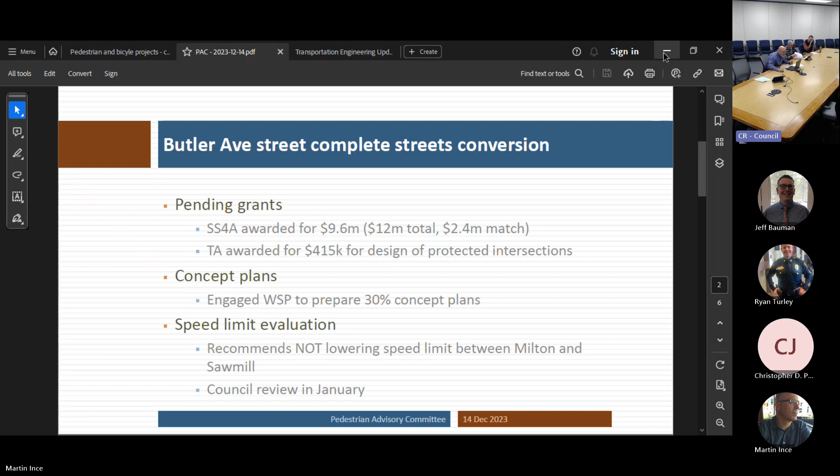Moving on to new business: pedestrian and bicycle project capital and grants planning.

We recently kicked off the city's annual budget season, in which the entire budget for the city is prepared, reviewed, discussed, revised, and discussed again. At some point before June 30th, it goes to council for final approval. One component of that is the capital plan, which we do every year at the same time. For the capital plan, we identify capital projects we want to build over the next 5 years. Anything that goes in next fiscal year's budget, we have money for - it's physically part of the budget. Anything in the 4 years after that is a plan. So in theory, if we build what we intend to next year, the first year of the capital program moves up and becomes our budget, and we cycle through it. Rarely, however, does it actually work that smoothly.

Over the past couple of years, the ped and bike part of it is fairly well organized, if I do say so myself. We've identified all the projects we want to build and prioritized them, talking about which ones should go first. So much of what was in the plan last year will show up in the plan again this year. Our primary funding source is the transportation tax, which allotted $29 million over the 20-year life of the tax. That started in 2020, so it's been collecting money for a couple of years already. We can also supplement that with any grants that come our way, and we've been successful twice - we got $5.5 million for first mile, last mile, and now almost 10 million for the Butler project. So that certainly helps.

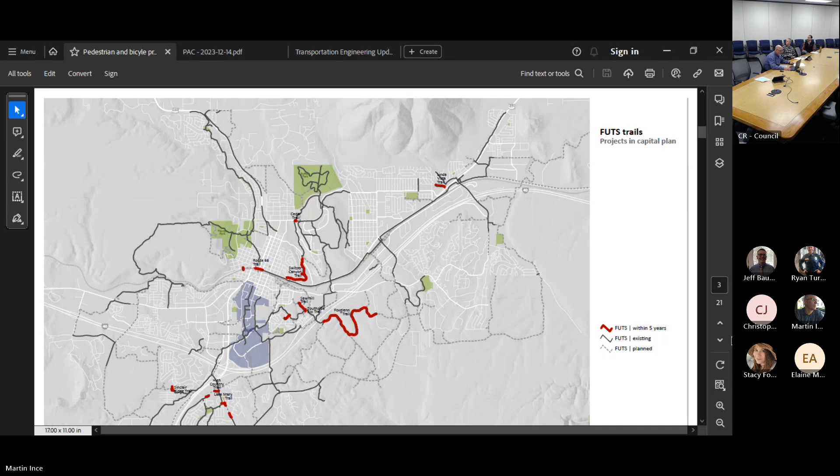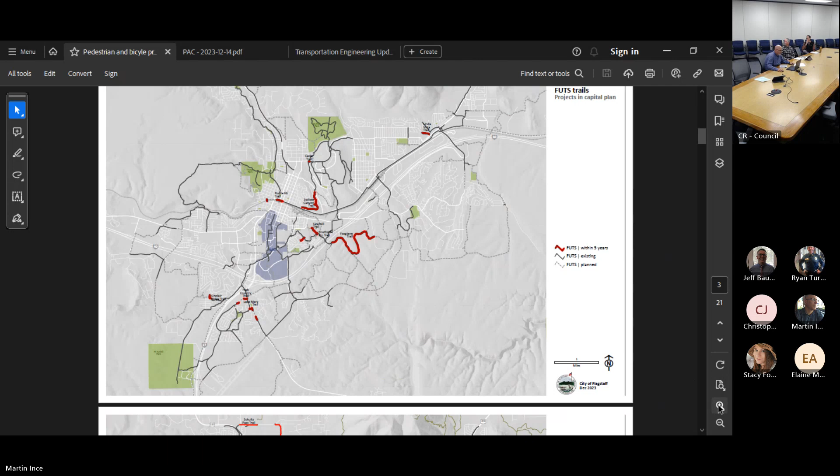Let's see if we can... Is it tough to see, or is that okay? It's tough, but... oh, that's better. Thank you.

Okay, so this shows the projects that we'll have funded over the next 5 years. Switzer Canyon, we've been working on for a while. Fox Glen has always been kind of out there. Those are the two big projects.

A few of these other ones you can see are kind of fill-in, like the ones down here at High Country and Lake Mary. We're anticipating that development is going to build the pieces in between - you can see these are two ends. Once development does that, there becomes a greater need to complete those end pieces to make the thing functional. And then a couple other short ones.

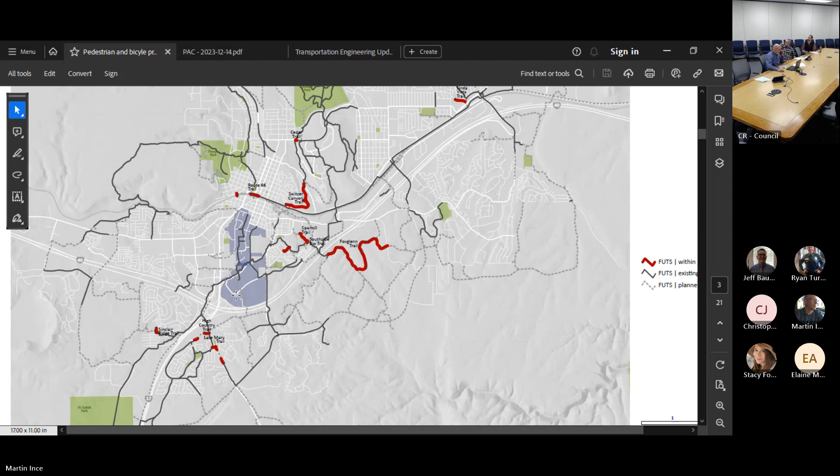So here are the single track connectors. One of the advantages of these is that they tend to be less expensive than full FUTS trails—well, a lot less expensive. So if we put a little money aside, we can afford more of them.

This may be a little bit ideal, but this is what we would have money for over the next 5 years to build these out. So if the budget is approved, there would be funding for these over the next 5 years.

That'd be great. Nothing wrong with that. It's wonderful—that's a lot of trails. Maybe a little bit optimistic, but I like that, Picture Canyon would be nice. Get off the road, yeah, that would be nice, wouldn't it?

And then some of these provide access to—so that one at the end of Paradise is also relevant to my professional interests.

What exactly is that one? I think that's actually going to get done as part of the basins that are going in. So we have a couple places within the city that have trail access out to that. It used to be a city park, designated as a city park, and now it's where the basins are going—one's from the end of Appalachian, one's from the end of Adrian. So it's from the end of Park.

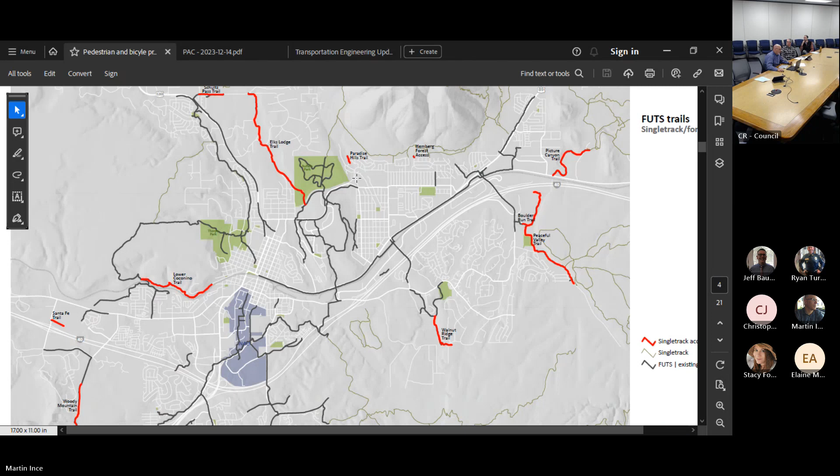So those are single track, and then a couple over here in the southwest are really connections for the loop trail. This one along Woody Mountain continues the loop trail—the Santa Fe Trail. What you don't see here is the piece in between would be built as part of future phases of Timber Sky. So they'll build a FUTS trail up to their property line, and then we have a short distance to go to connect here in red to Flag Ranch Road, which would make that a really useful connection—even for people who work at Gore, for example, would find that useful.

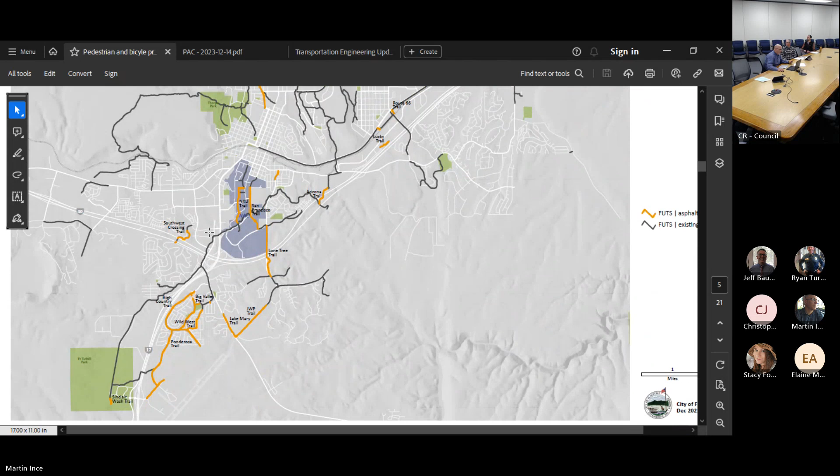These are the asphalt trails.

So the ones on the NAU campus are not the city's to maintain. Some of the shorter ones, we probably won't include. The Southwest Crossing one, that's in fairly bad shape.

Which one is that? It's the one that goes under the interstate from like Boulder Point to University Heights. Oh yeah, thanks, that name.

The other ones are more familiar—the one along Fort Valley Road, along Lone Tree, JWP and Lake Mary—those are actually in pretty good shape. Is it? Yeah, it's not bad. Yeah, the Lone Tree one's got gaps.

Is JWP—I almost killed myself on that, there's these huge potholes. Yeah, maybe it's on the south side. Not the gaps, okay. Yeah, Lone Tree's bad enough to where—really? JWP, asphalt FUTS path—yeah, is it really? Yeah, it's really bad, at least if you're on a bike. I mean if you're just walking, obviously it's not a big deal.

Yeah, when I saw you and I came out that way, I thought it was all right, but I guess I was going a little bit slower than you were going, John. Yeah, if you just walk it it's fine. I guess relative to Lone Tree, it's—yeah, Lone Tree's a mess.

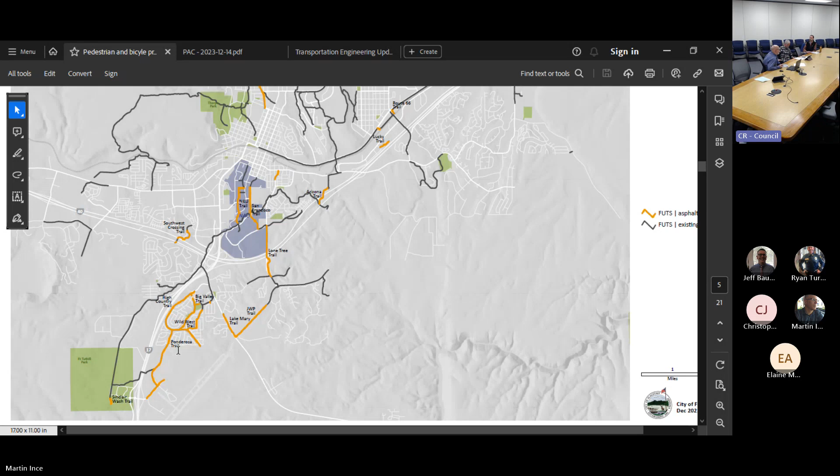I think, when I look at the map, there's only a couple that aren't along roads. The one through the middle of Ponderosa Trails neighborhood is one, and that southwest one is another. So in theory, we could think about converting those to aggregate. But I think by the time you factor in the cost and the reduction in usability, it probably isn't a good investment for the city, but we'll keep it on the table.

And then the last map here is potential grant projects. You can see our Picture Canyon Trail really works best if we can extend that FUTS path all the way past Home Depot.

Marshall Trail, the context for that is changing a little bit because the school district is planning on demolishing the existing building and building a new one across the street, where charter schools were most recently, and some time ago that used to be junior high, Flag Junior High. The need for the trail is still there to make that connection over from Fort Valley, but it may be a little easier since there may be fewer encumbrances on that property.

This group is really the trail that goes up to Lowell. That would be separate from the road that goes up, but it includes the realignment of the Mars Hill Trail, the really, really steep section.

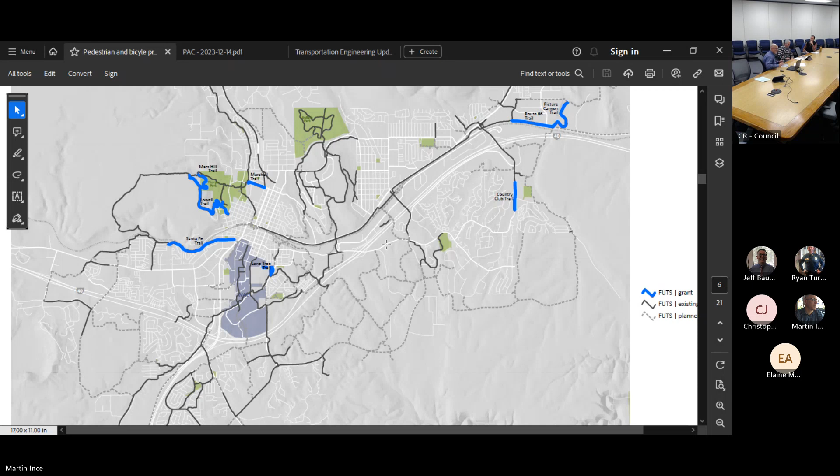Okay, moving on to sidewalks. Our categories in the capital plan here are sidewalk infill, sidewalk projects, and then first mile, last mile, and potential grants. I'll go right to the maps.

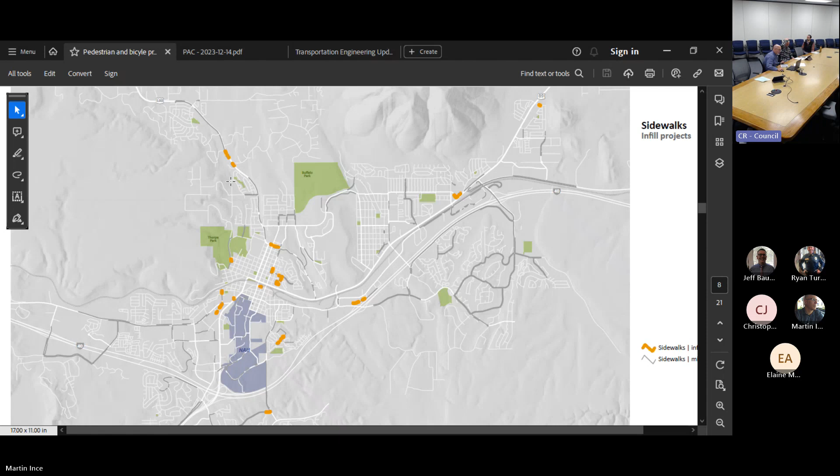These are the infill projects. We've had a good relationship with the city's streets department, so we use the same contractor that does the road repair and street safety projects, the mill and fill overlays on streets. If we can identify sidewalks and give them the money for it, their contractor is happy to do the sidewalks as well. At this point, we've done all the easy ones that don't require plans, where a sidewalk ends here and ends here, and you just pour the sidewalk in between to connect. The next round will probably require some version of an engineered plan to see how they're going to work, and it may require curb and gutter, small retaining walls, grading, drainage considerations, whatever it is, but we'll include that as part of it and hope to keep doing that.

Here are the projects. We only had two identified: the missing sidewalks on Fourth Street, and then we've been talking about adding a sidewalk bike lane along the Linda Vista ramp, which goes from Linda Vista to Cedar.

Can you picture how that works? Would that be impacted by the wedge detention basin at all? The road's still going to be there, I guess. We would build on the other side of it, so it wouldn't be physically impacted. It would be part of the same project, taking advantage of the work being done there. If we give them some money, they'll already be mobilized. So I think it's a good opportunity. I just want to double check, we had not identified this before as one of our potential projects. It probably falls into that second wave of priorities, but it feels like a good opportunity since somebody's already kind of there.

No matter what we do, that detention basin is not gonna look great. So any other improvements we can make in the area to make it that corridor? That whole Rocket Cedar is gonna get hit with some flood mitigation stuff soon, and it's going to look different. That's a good way of putting it. So we'll distract the pedestrians with a nice sidewalk.

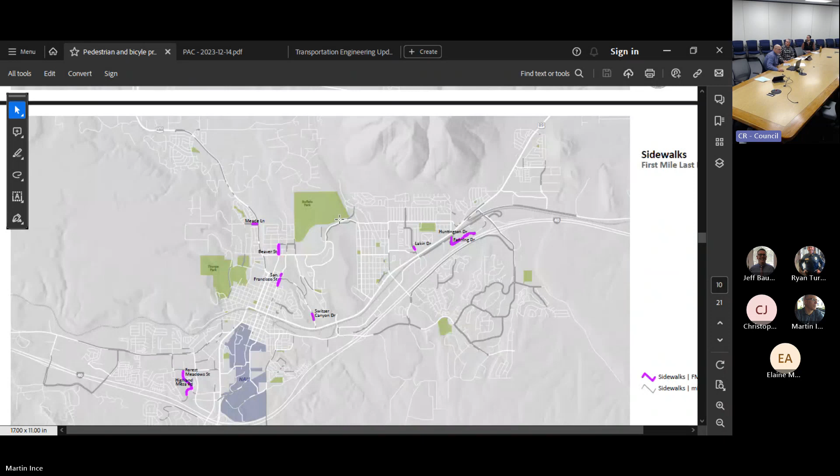Moving to first mile, last mile. That's really the reason we don't have many sidewalk projects identified, because we have more of them here in the first mile, last mile grant. We're working on this and will give an update later on the status of that project, but we're continuing to work through the engineering part of it.

And these are the sidewalks that we're considering. And the last one is potential grant projects. Some of these overlap - like you say, aren't those the fourth ones? Yeah, yeah.

How do they overlap? Wasn't it capital project they were listed under? Yes, so if we identified them for grant funding and got a grant, it would just supplant the capital money - we'd use that somewhere else. Some of these, like the ones by San Francisco and the one on Fort Valley, and even some over here by University, were originally part of first mile, last mile, but for different reasons have dropped out. So a different grant might be a way to pick them back up.

I just have a little bit about bikeways. Our categories are signing, bicycle parking, projects that involve only striping and marking, bike boulevards in the out years of the capital plan. Are you familiar with bike boulevards? They're quiet residential streets that make good bike alignments.

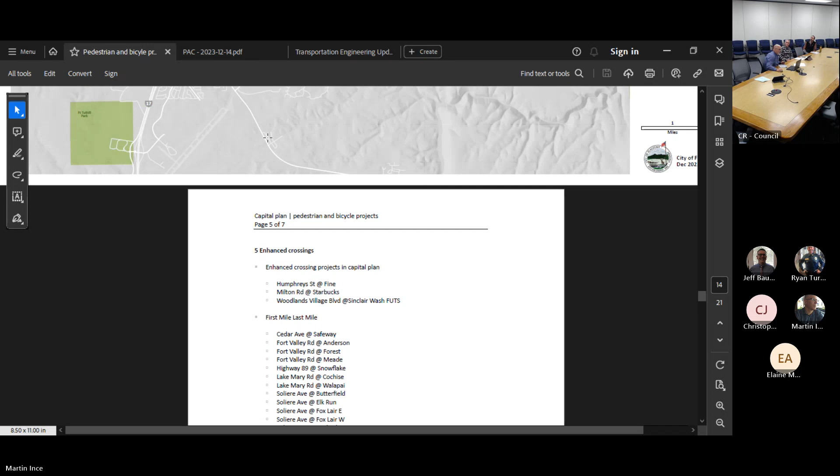So is this widening of the road and construction of, sounds like separate bike paths, or it says bikeway - what does that mean exactly on there? It would depend - some of these, like the Milton one, this one on the west side, and the one out here, would be a combination of improvements on existing streets, and then maybe trails that connect in between, where necessary.

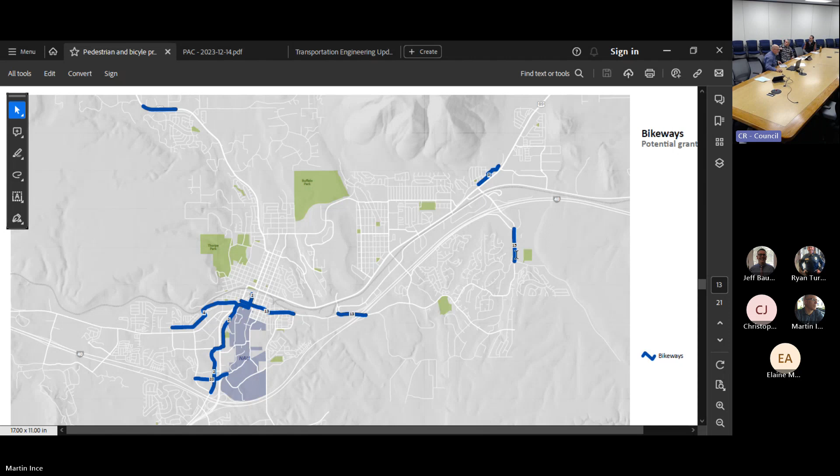This one could be on-street facilities, or if it's a bigger project, it could construct separated facilities through that area. This would probably be a construction project just to replace what's there now. So the details haven't been totally figured out - this is just conceptual, broad brush.

That would be one of the purposes of doing the concept plans for it, is to get more detail, so when we ask for a grant, we know exactly what we're asking for, and what it might cost. Enhanced crossings - we have a couple of projects in the capital plan, a handful of them in first mile, last mile, and then a few of them are good potential grants. I'll show you the maps.

Here are the potential projects: Humphreys at Fine, that's on an ADOT right of way; Milton, somewhere in the vicinity of Starbucks, also on ADOT.

And then we've included this one, but I know there are some issues we need to work through to make it work. It's the crossing on Woodlands Village, between the Walmart and Big 5. That one's a little tricky. I live in University Heights, and that crossing prevents me from having my kids take the public bus home from school, because it's so hard to get across that thing.

Yeah, people just, when they come out, they're like, whoa. I know it's there, right. I could use some help. I'm driving slow because your kids might pop out. So I point out, especially there, yeah.

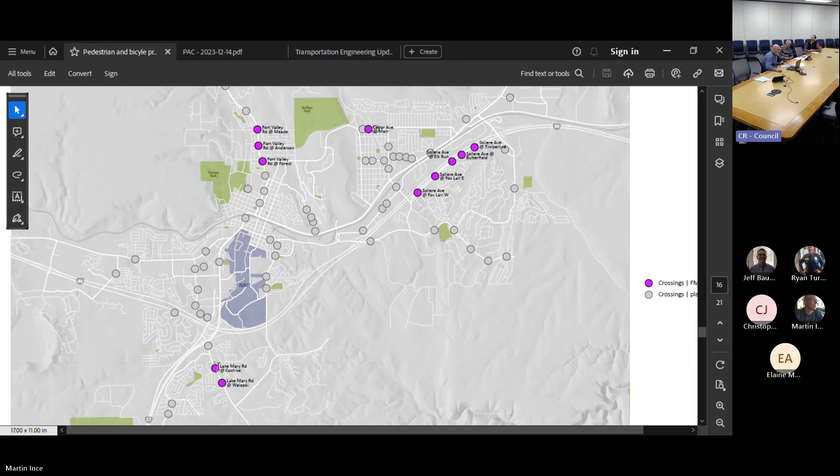And then here are the grant ones. Humphreys at Fine and the Milton ones show up again, if they would make good grant projects. We had identified the one at Butler Avenue on O'Leary in the past and actually had it in the capital plan, but it's been absorbed into the Safe Streets for All project. And then this one I show, Huntington Drive. Flag Shelter Services has bought the hotel there. Mountain Line has a transit stop, so we're working on different ways of getting people across Huntington. If that were a grant, it would be something Mountain Line applied for, not necessarily the city.

And then I should mention all these other, kind of grayed out ones, are where we have identified potential crossings, but not all of them are high priority.

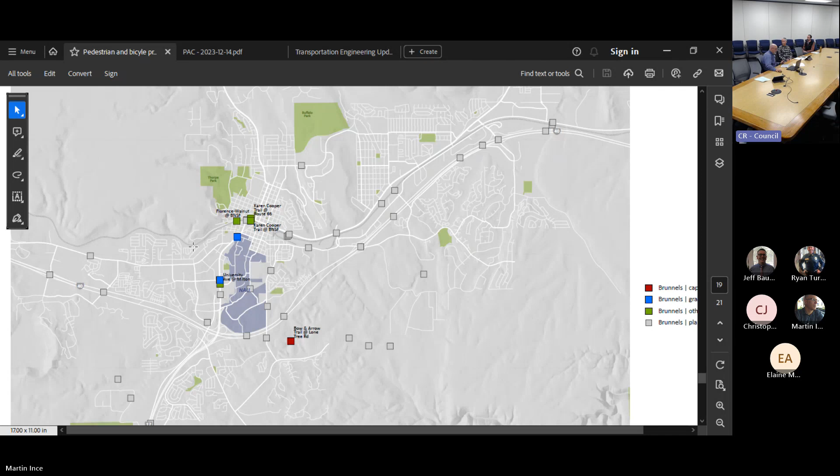And then again, the gray ones are other planned projects, but these are the ones that have floated to the top as priorities. And then the last category, we haven't had in the capital plan before. We just included them to see if they would make good grant projects.

We call them complete streets or street conversions, but they fall into different categories even below that. So I'll show you the map. This is Fremont, that's what we're working on already to narrow the road. And this is Country Club here, from Oakmont or Bear Paw on the south up to Soliere on the north.

As a complete street, we'd be looking at all the things. It needs a sidewalk on one side. We talked about a bikeway or a path on the other side. So can all those things be wrapped into kind of one project? Similar with Cedar Avenue—can that street be redone in a way to make it easier to cross, more comfortable for pedestrians and bikes? 4th Street, kind of the same category.

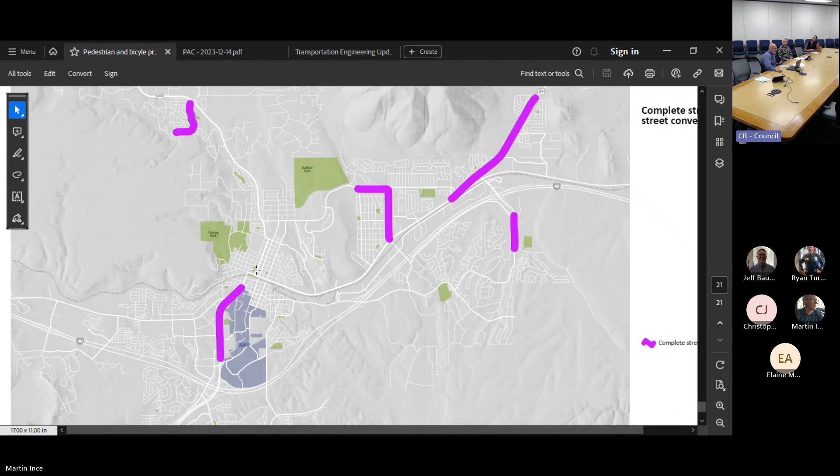The other two we have on here are Milton and Highway 89. These are shown here because either a safety study is being conducted, or we've asked for a safety study to be conducted. The results of that may suggest projects to improve safety that could be eligible for grant funding. So we don't know what it would look like, but those might be future projects, so we'll include a placeholder in the capital plan.

And that's kind of it. That's it? That's it. That's all?

Yeah, makes me feel better about paying my property taxes. No, there's some great stuff in there, and good progress. Actually, it's less your property taxes, more like sales tax. Okay, well, I have no trouble buying stuff too, so continue. So if you're putting off buying that new Mercedes, for example. Well, I'm more of a 10-year-old Toyota guy. So we will continue, I'll include this on future agendas, but we may not have to have a lot of discussion, just to show you where we are in the process and what our thinking is. Yeah, that was great, part of it.

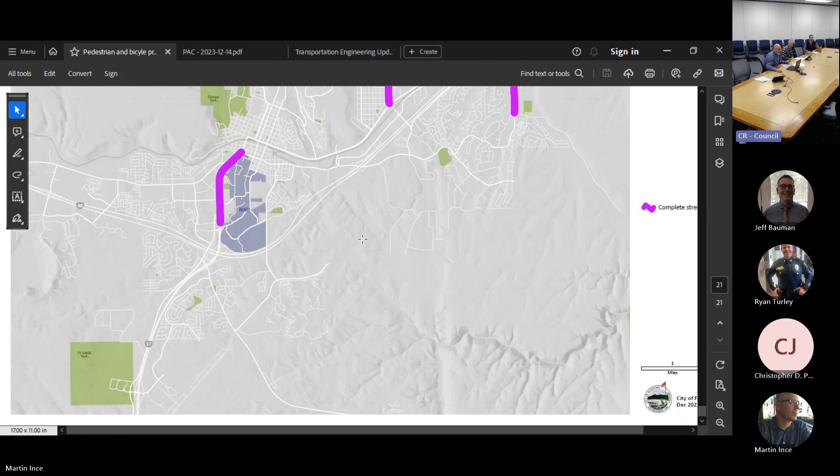Second item on new business: revisions to engineering standards.

There was no—every time it meets, yeah. Oh, and she can come in. Back. Good.

Okay, so just a little bit of context on this. The city has a document of engineering standards, and it essentially tells people how to build things. For example, there's a detail in there for FUTS trails, about how they're supposed to be built, how thick the concrete is, how wide they are, all that kind of thing. And then you can imagine all the other things that people build, from manholes to water lines to fire hydrants, are all included in the engineering standards, so they're built appropriately and in a way that reduces maintenance. So periodically, these are updated.

Following adoption of the Active Transportation Master Plan, we did a comprehensive review of the engineering standards to see what we might change to bring it more in line with the recommendations or the wording in the ATMP.

We've taken all those potential changes and divided them into three categories. The first are the ones that are relatively easy to do—those are the ones we're working on now that we'll talk about tonight. The second category are relatively easy, but require either more information or more discussion on the part of staff before they're ready to move forward. And the third category are the ones that are more difficult, that require a lot of information or a lot of conversation with the public, even a consultant study in some cases, to figure out how we want to change the engineering standards to incorporate those.

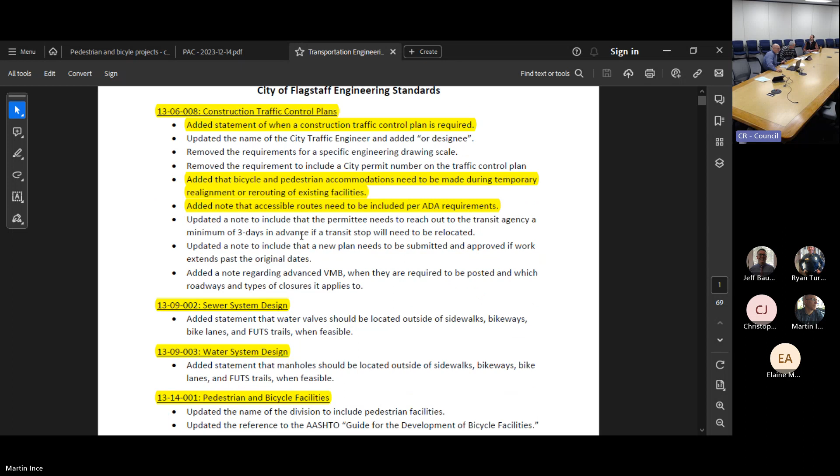So again, this is just the first round. I've highlighted the ones in yellow for us to talk about—those are really related to our mission here, pedestrian accommodation, as well as the ones that relate to the Active Transportation Master Plan. So I'm going to go through this. This is a short synopsis of the changes. I'll describe what they are, and then the actual changes are further down in this document. We'll look at a couple of them, but not all of them. And again, if you have any questions or comments about them, just jump in.

The first section is about traffic control plans. This is when construction or maintenance activities can affect streets, close lanes, or close the entire street.

We've added a statement here that whenever you affect sidewalks, bike lanes, or FUTS trails, a traffic control plan is required. This gives us an opportunity to review the plan and make sure there's a detour in place, or that the facility isn't being closed unnecessarily, and gives us a bit more control. We generally try to do this anyway, but having it explicit in the engineering standards gives us more leverage.

We've also added that bike and ped accommodation needs to be made when we have temporary realignments or rerouting, so either they are accommodated through the work zone or a detour is provided for them.

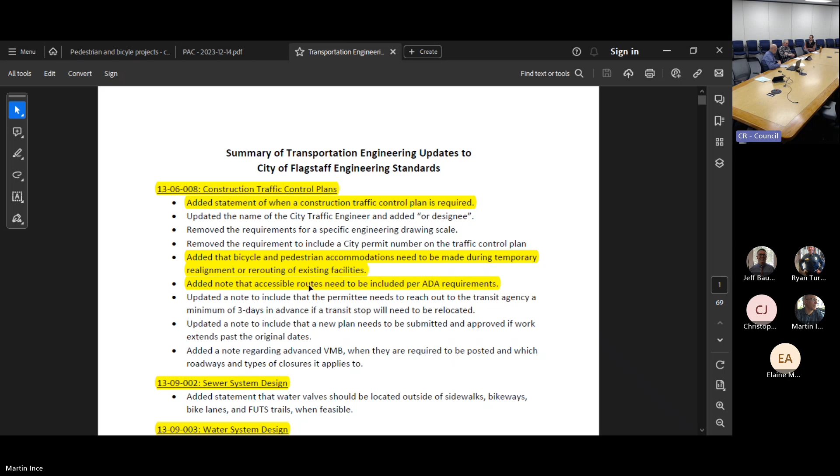The same goes for accessible routes. This is actually part of the new ADA guidelines. If you have an accessible route along a street, you have to maintain that route during construction. And that includes, if you have a new temporary sidewalk alignment, it has to have ADA grades, sidewalk ramps, all of that.

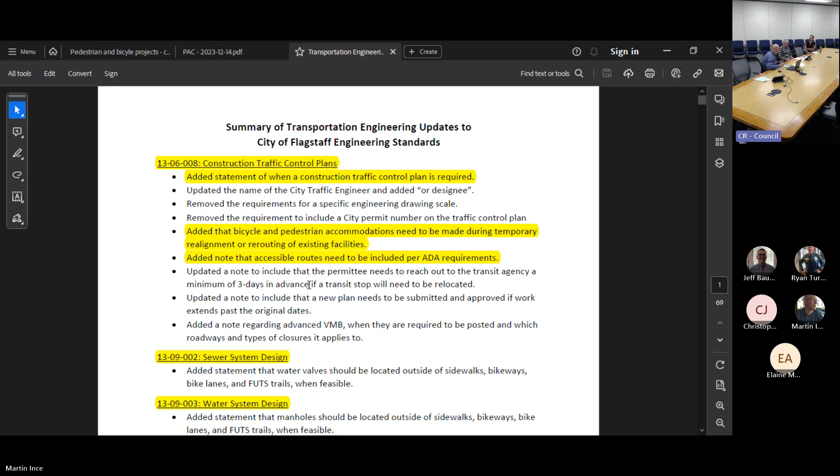Next, these two go together. It's simply that where we build water valves and manholes, they should be outside of sidewalks, bike lanes, and FUTS trails wherever possible.

Next down, sections 13-14 in the engineering standards currently have almost nothing in them, just a brief reference to a bicycle guide. So we're adding more text for bikeways, pedestrian facilities, and FUTS trails.

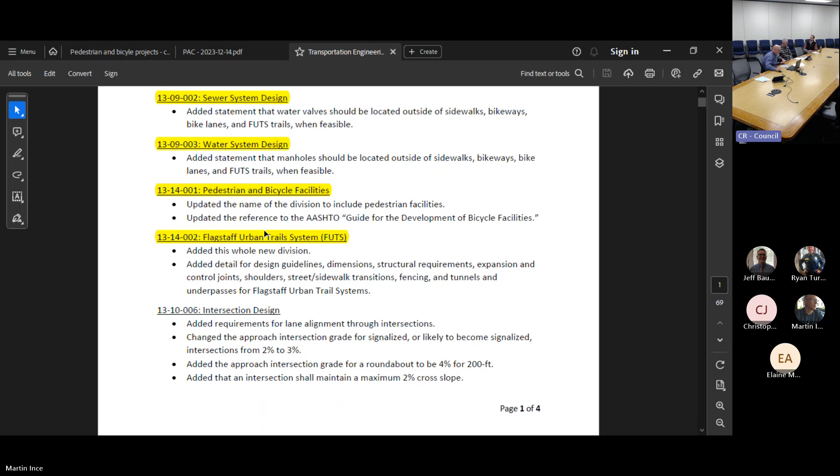In the first round of changes, we're taking a bunch of text that was previously included on the standard drawing for a FUTS trail. There's a drawing of what a FUTS trail would look like, and then a ton of text included in it, and a lot of that text was more relevant in the document itself instead of being in the standard detail. So a lot of these things aren't necessarily new, we're just moving them from the detail into the text part. I'll go through that in more detail in a bit so we can see what those changes are.

Signal design elements. Here we are asking that signal cabinets, poles, push buttons, and streetlight poles be out of sidewalks, bike lanes, and FUTS trails. This generally has not been a problem, but we just want to make it clear.

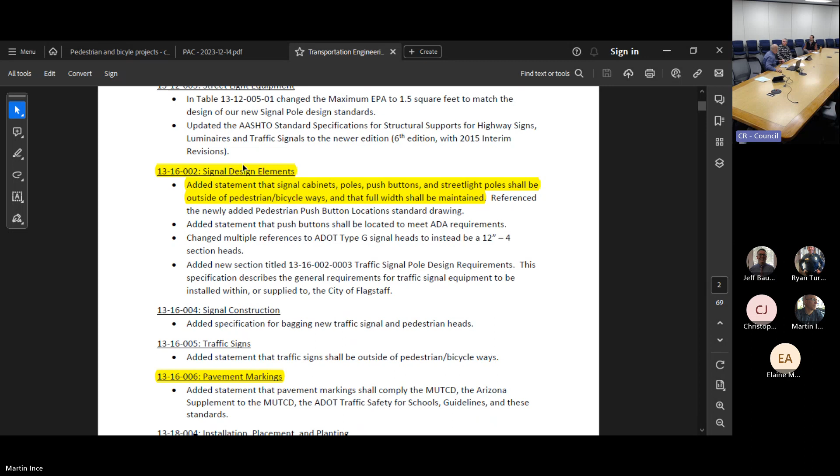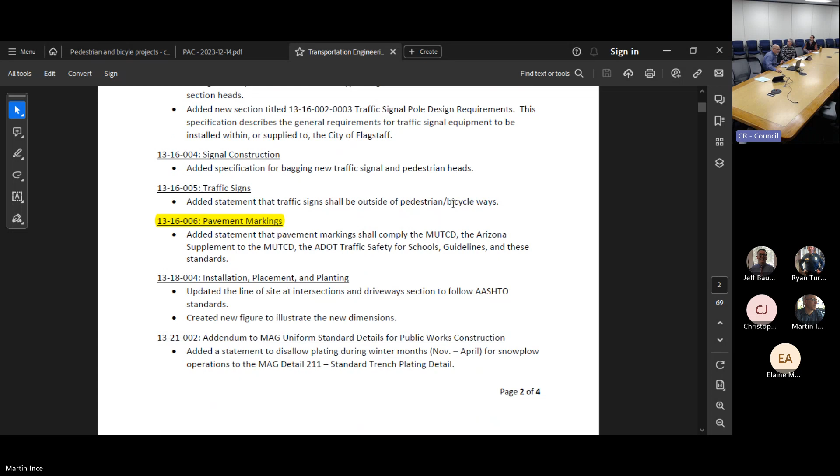Pavement markings. Here we specify that they should conform to the Manual on Uniform Traffic Control Devices, so just a reference to federal guidance.

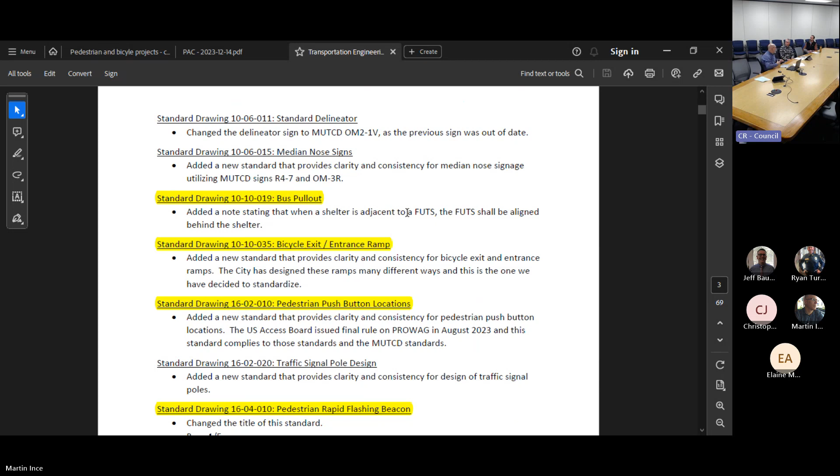On our detail for a bus pullout, we ask that a FUTS trail be aligned behind the bus shelter instead of in front of it, to avoid conflicts between trail users and patrons waiting for the bus.

We've included a new detail for an exit entrance ramp for bikes, so when we go from a bike lane that's on the street to a FUTS trail or bikeway that's off the street, I'll show you what that looks like.

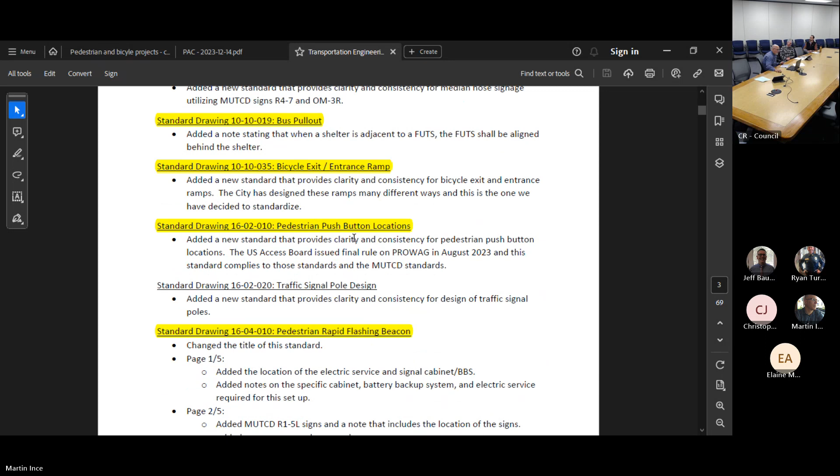Pop a wheelie, jump the curb. You're always welcome to do that if that's your preference, if you want to look cool. I suppose.

We have a new drawing for push button location that complies with the new ADA guidelines. They're referred to as PROWAG, the Public Rights of Way Accessibility Guidelines. They were just elevated from kind of having them as a document to actually having them as official guidelines. The next step, if it happens, would be that they'd be adopted as regulations, which means they'd be enforceable, really the federal law, basically.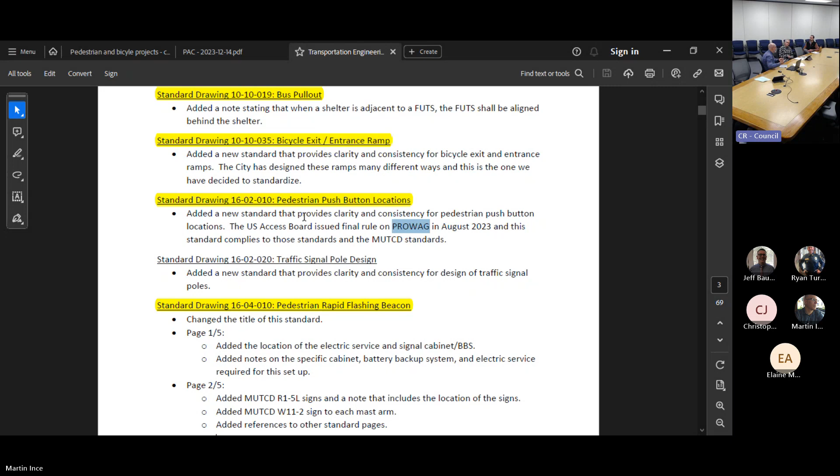As guidelines, they're somewhere in between, and they're guidelines for how to meet the ADA laws. So if we had a federal grant project, for example, we'd have to meet PROWAG. If we want things to be accessible, in theory, we have to follow PROWAG. Maybe at some point we'll try to digest what's in there and show that to you.

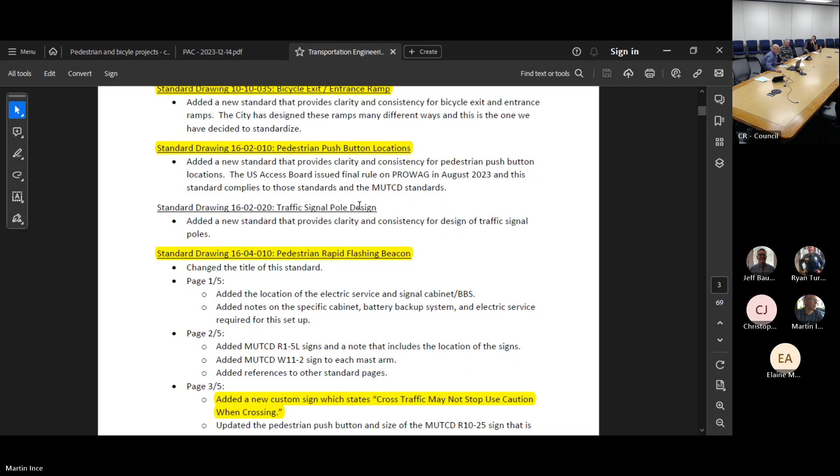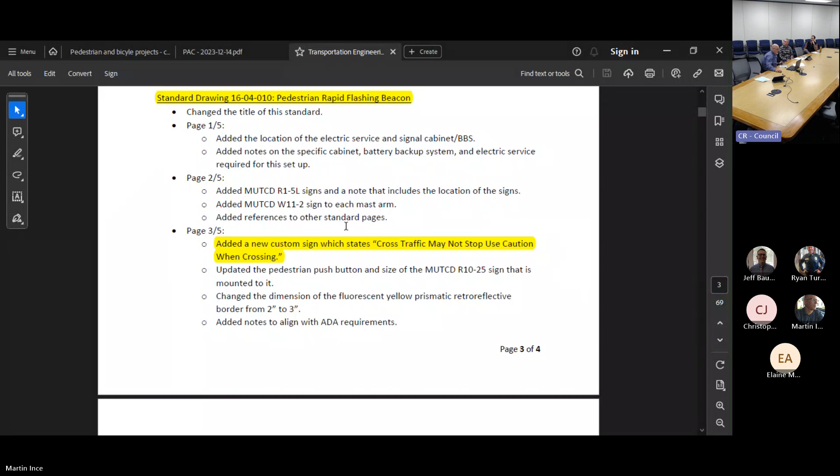There's a section on rapid flashing beacons. I'll show you the sign that's been added that says cross traffic may not stop, use caution when crossing. Of course, this is for pedestrians, just to make sure they understand how those things work.

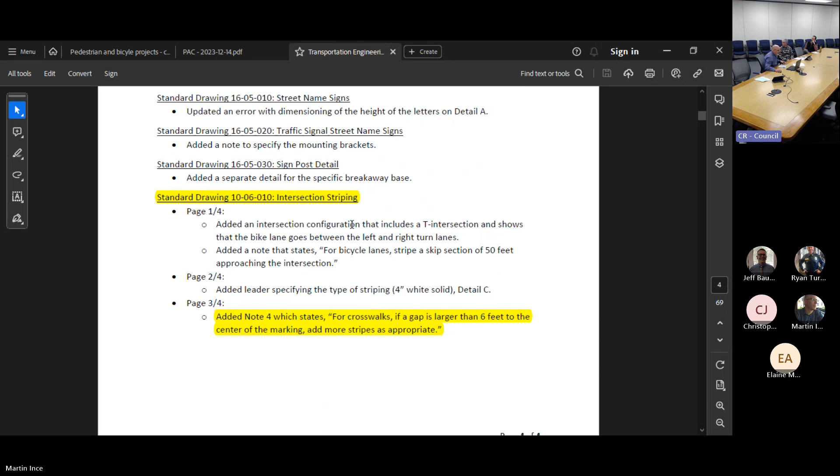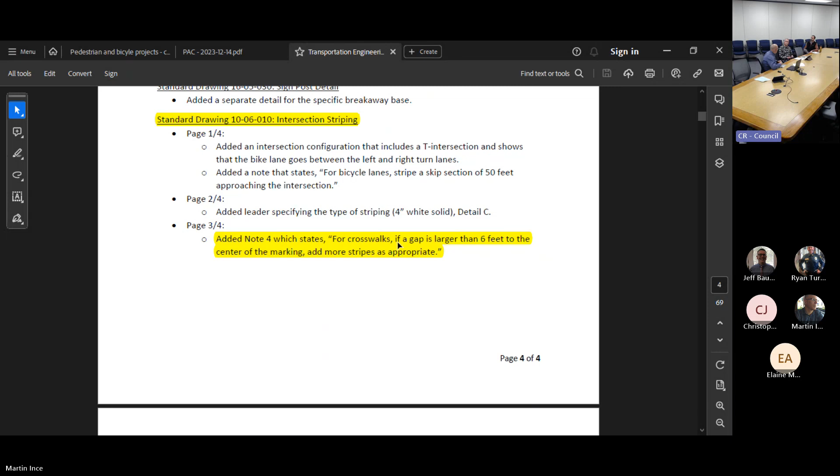A couple of enhancements to the bike lane striping and a small change for crosswalks. We use transverse markings for crosswalks, the so-called piano keys, and we try to align them so they're out of wheel paths, so they wear out less quickly. But sometimes if a lane gets really wide, or if the arrangement of the road is kind of wonky, you can end up with long distance between those markings. So we want to make sure that it looks like a crosswalk, even if the street is kind of wonky that way. That's the synopsis of the changes.

I'll skip down here. You're more than welcome to read this on your free time. So here's the section on 13-14, where we've added all the FUTS stuff. I'll go through this quickly.

Section 2 includes a number of dimensions for a trail. It's 10 feet wide, it has 2-foot shoulders, a 5-foot parkway. We specify a horizontal clearance from the edge of the trail. What was the title of that?

Section 13-14, Bicycle facility, that's like... Was it just bicycle facilities? Is that what it said? Yeah, I think it's going to become FUTS trails, pedestrian and bicycle facilities, from just bicycle facilities. Just make sure we get pedestrian. Yeah, good eye, good eye.

And then we have it kind of divided here into 2 divisions: ped and bike facilities, FUTS trails. We don't have much for the ped and bike facilities, but we'll start to populate that as we go along in subsequent updates.

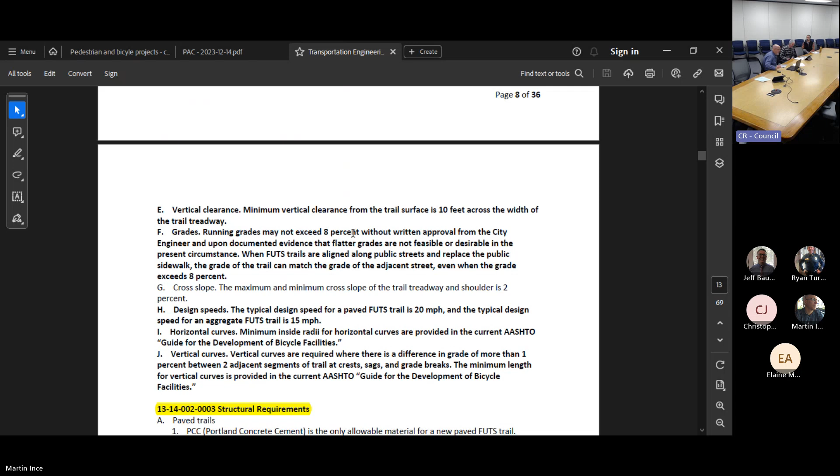So we have a horizontal clearance of 3 feet from the edge of the trail, a vertical clearance of 10 feet. Grades, we specify not to exceed 8%, although we give kind of an out if you really can't make 8%. Cross slope, we specify a design speed of 20 miles per hour for a paved trail and 15 for an aggregate trail. The design speed helps determine the horizontal and vertical curves.

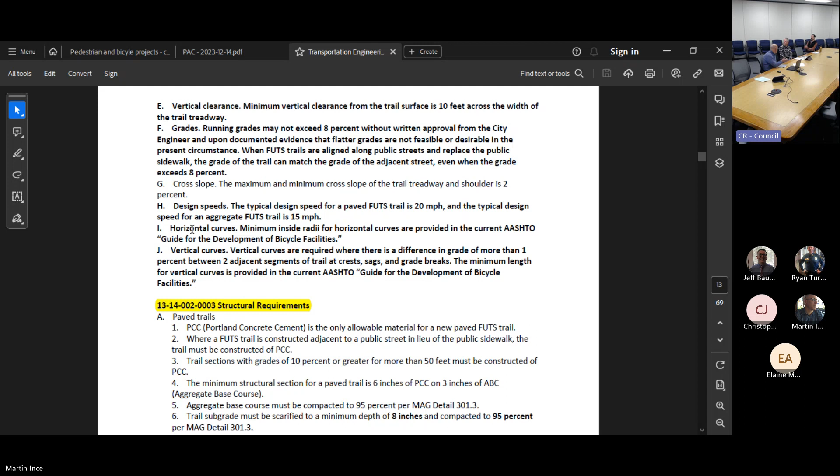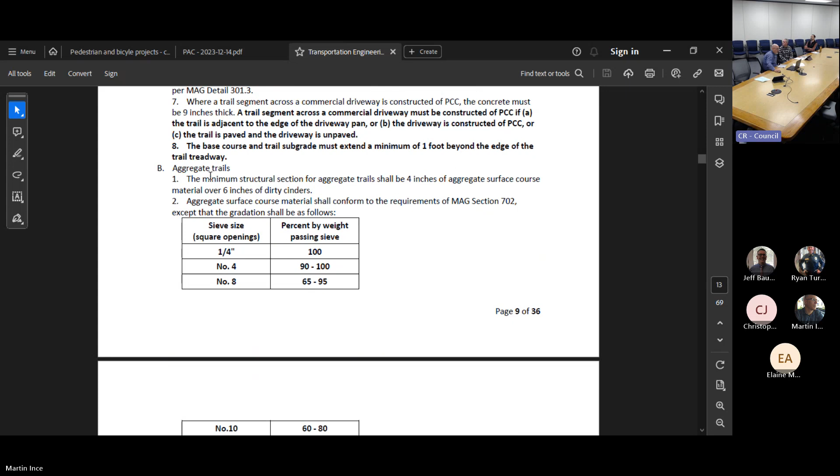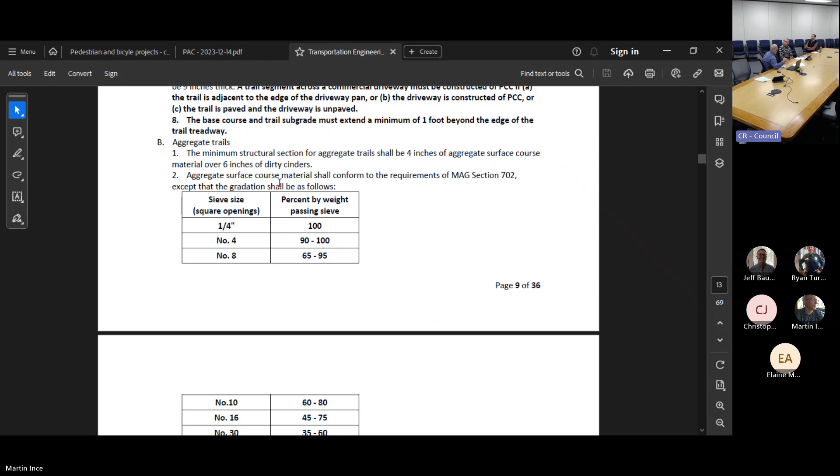Section 3 is structural. That's divided into paved trails and aggregate trails. Here the biggest change is we specify an aggregate gradation that matches the material we've been using the last couple of years - that light brown, very fine mix. You can see here, the largest aggregate material in that mix is a 1/4 inch, so about this big. Our previous material was a little bit bigger.

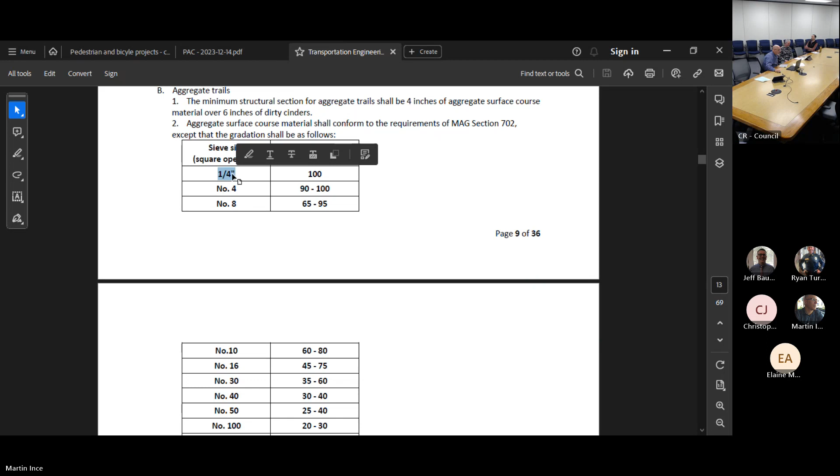Our previous material, the largest piece was an inch, which when it gets loose, is really difficult for a lot of things - it's hard to walk on. Bouncy. If you're pushing a stroller or have a walker or wheelchair, it's almost impossible. So we've been doing this for a couple of years, but this makes it kind of our official guideline, so we can require others to do it as well.

I won't go into too much detail about expansion and control joints, but we just try to make the concrete surface as smooth as possible for wheels, which includes bikes, but really most benefits small wheels, like front wheels on wheelchairs, walkers, strollers, etc.

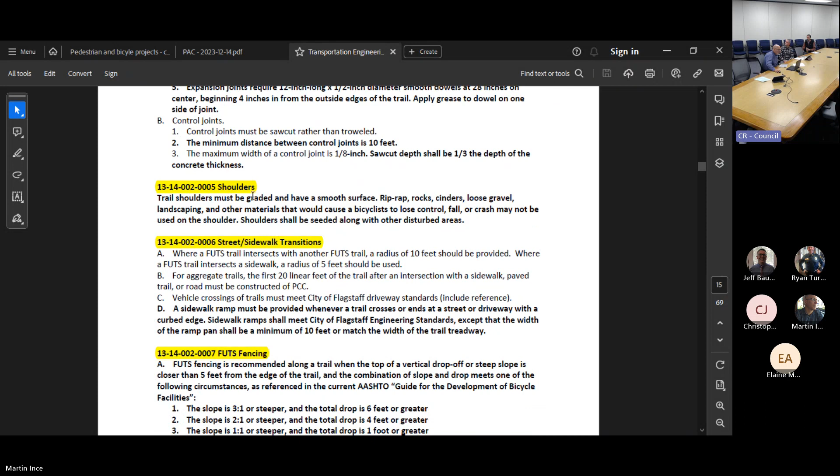Some details for the shoulder. Trails are 10 feet wide, but there's a 2-foot shoulder on either side that's intended as kind of a bike recovery zone. We want to make sure that it's useful, functional for that.

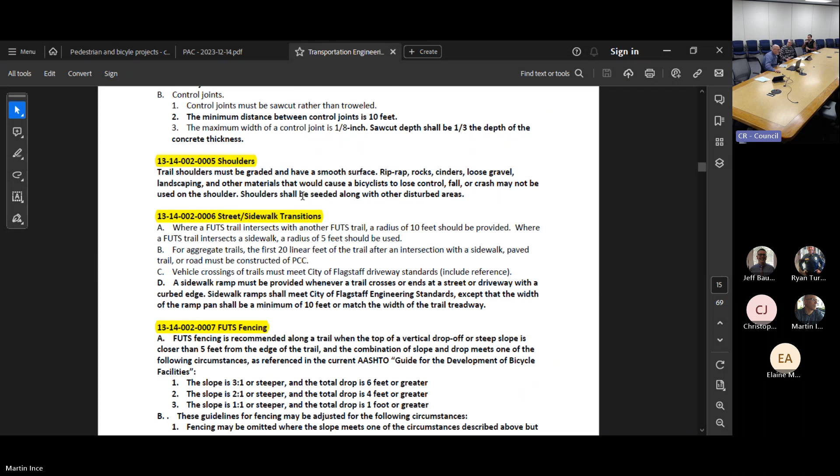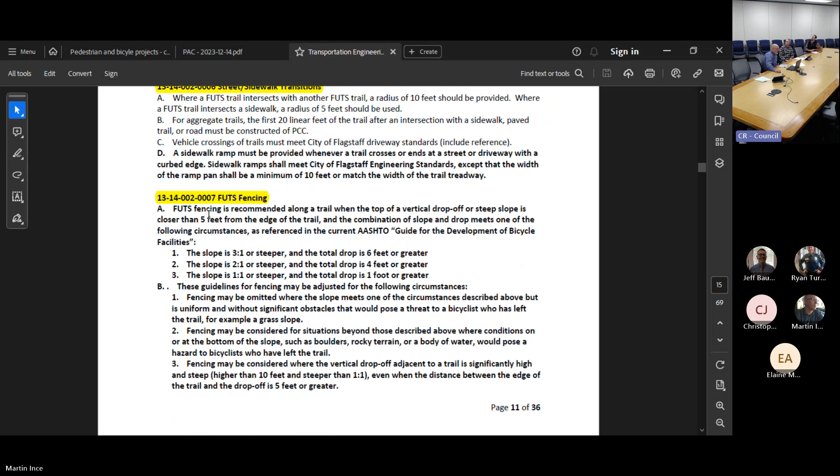A section on transitions between FUTS trails and sidewalks and streets, and then guidance on where to use FUTS fencing. Most of this is taken from AASHTO's Guide for the Development of Bicycle Facilities, and we've included it here to provide people with guidance. Really, FUTS fencing is intended as like a safety rail to keep you from - if you're on a bike and you go around a corner and go too fast, you go off the trail - what do you run into? Is there like an alligator-filled lake down below, sharp pointy rocks, a wall?

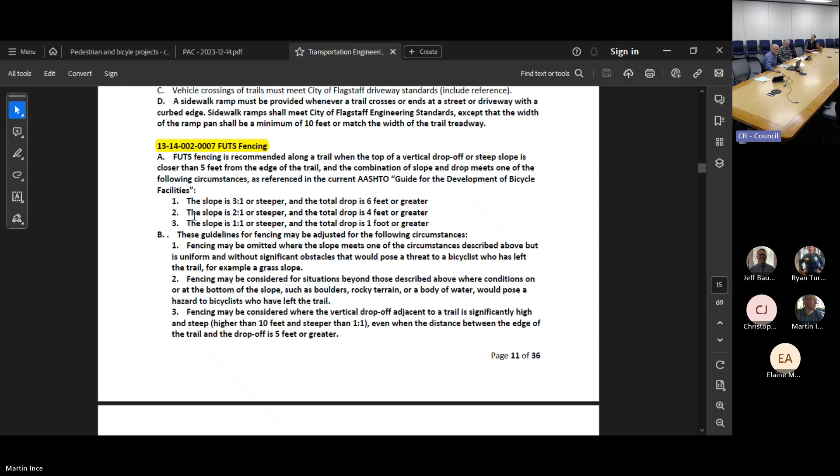And there's a trade-off here. If you're going off the trail and we have a fence, you're going to hit the fence. So what does more damage, hitting the fence or going off the trail? AASHTO lists this based on how steep the slope is that you go down and how much the drop is - the more shallow, the more the drop, it tells you where fencing is needed. Really, our intent with this is not to overuse fencing, because it's expensive, and if fencing is along both sides of a trail, people can feel trapped, like you're in a cattle chute.

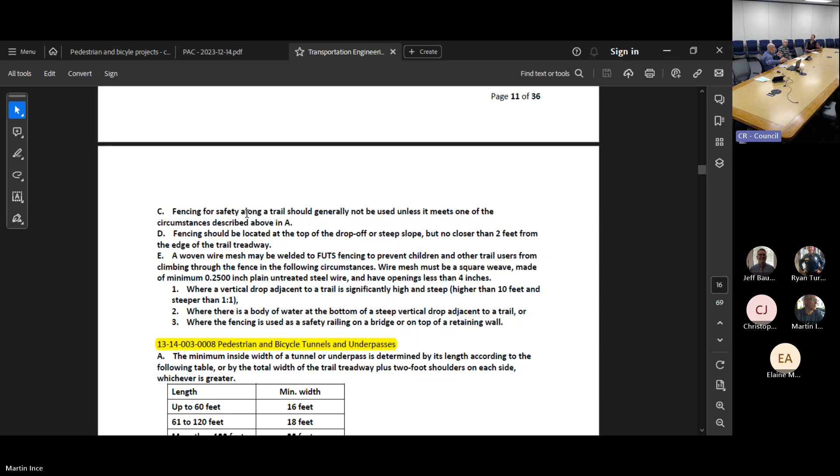Some standards for tunnels and underpasses. We specify a width based on the length, so the longer they get, the wider they should be, just for comfort. And then a clearance of 10 feet. So that's FUTS trails.

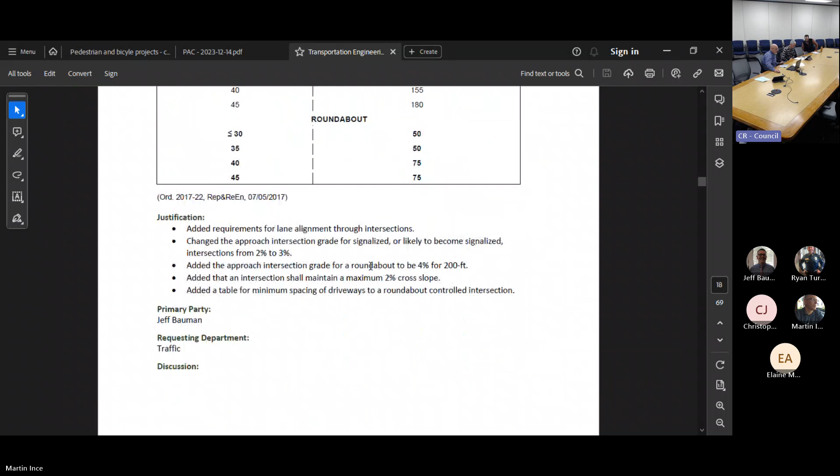Just a couple other things really quickly. Scroll - a lot of changes.

Sorry, I didn't realize it was this far down. This document has enlarged in the time that I looked at it last.

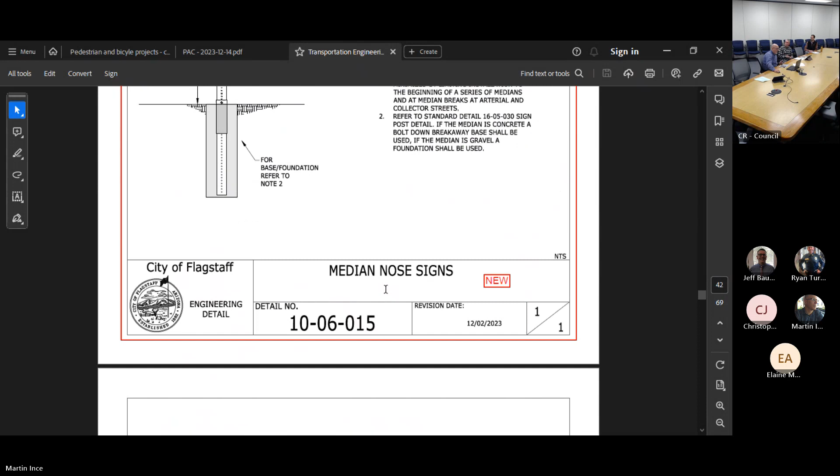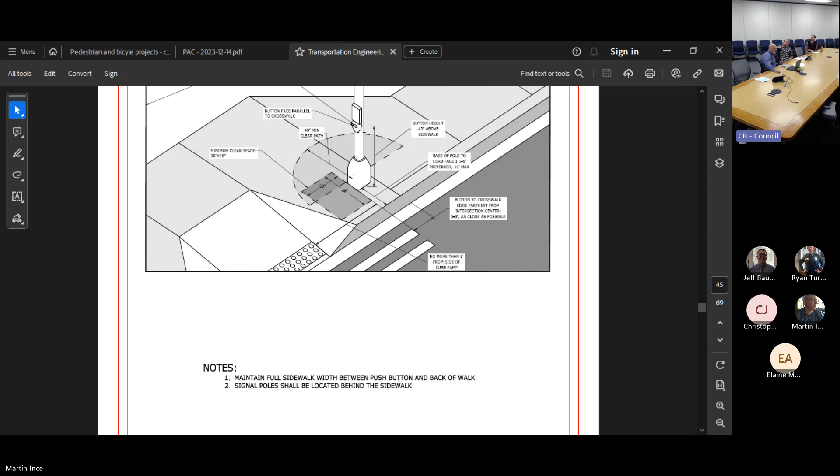Here's a push button detail, and here's a ramp. I think this may need some adjustments because I think the push button should really be here. So if you're in a wheelchair, you would be able to pull up alongside, hit the push button, and then continue straight onto the ramp, versus having to go over to push the button and then back to use the ramp. We'll straighten that out.

I think the last one I wanted to show you is just the rapid flashing beacon detail. It's located here. Really these changes are just adding a mast arm that goes out over the street. It's the current national guidance, and it gives this flashing light over the middle of the street, so it's much more visible to vehicles. Before they were on the sides.

So here and here, we've had a bunch of discussion about these crossings, and I think we may think of these in terms of different configurations. We may not always need a crossing that looks like this. Sometimes it's enough just to go a little diagonal. In some cases it may not be needed at all. These are helpful in some cases where the ramp on this side and the ramp on this side are offset, so you can make up that difference in the island in the middle.

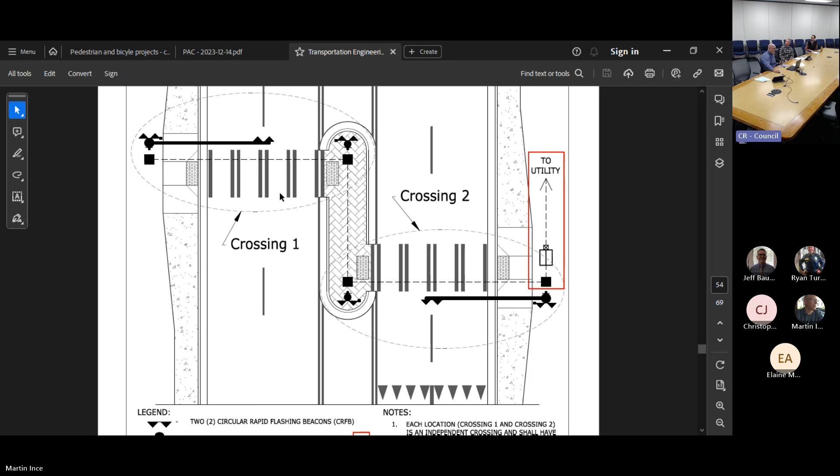And then this is the sign, which will go in the middle where the second push button is, to keep your risk managers happy. Look, it's just the light.

Any questions, comments? Procedurally, we've shared this information with developers, engineers, architects, builders, because they are sensitive to changes in city standards that end up costing more. There's been a lot of discussion even at the council level about things that make housing costs go up.

So we want to make sure everybody has a chance to see these and comment. Seems reasonable. A lot of that stuff we should do anyway, it seems like. And the cost may be small, but they still should have an opportunity to see them.

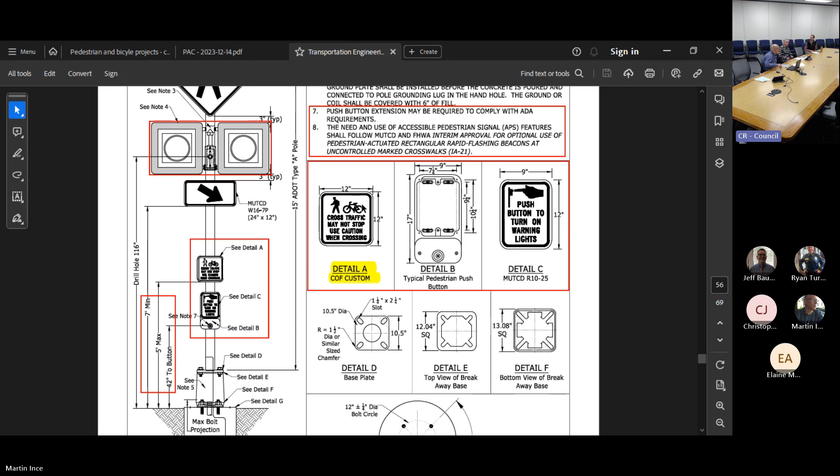So we're anticipating coming back to the Transportation Commission and a few other commissions at the beginning of the year, and then maybe going to council in March. So again, I'll keep an item on the agenda just to give you an update about what's happening, and if there's anything significant to talk about, I'll include it as an item.